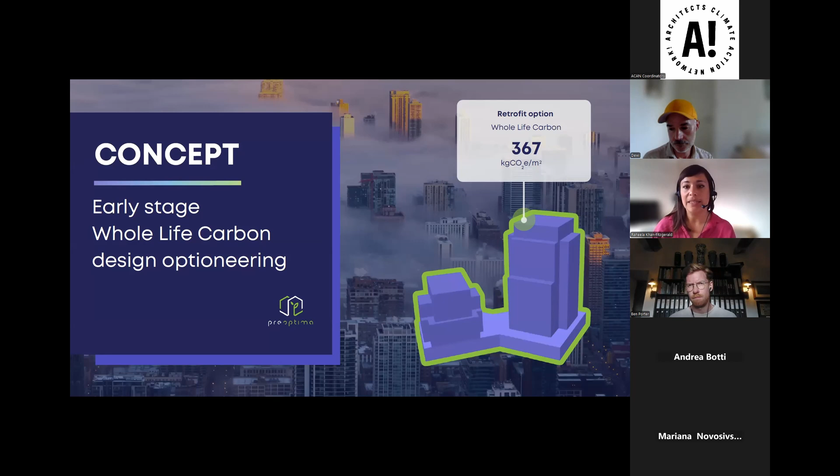Preoptima is a climate tech startup dedicated to developing innovative solutions to decarbonize the built environment. Our co-founders come from a background of over 25 years of academic research, and one of the first things Preoptima worked to launch was an industry-based web application called Concept, which is what I'll be talking about today. Concept performs real-time, accurate and easy to understand whole life carbon assessments and carbon optioneering from the earliest design stages. In 2023, in collaboration with Westminster City Council, Preoptima was also awarded an Innovate UK grant to develop the Planning Application Carbon Evaluation and Reduction Platform, or PACER for short. PACER aims to support local authorities to bridge the whole life carbon skills gap and ensure carbon policies lead to real impact. In essence, Preoptima's tools cover both the industry and public sectors, aiming to make whole life carbon measurement and management more accessible and intuitive for all in the industry.

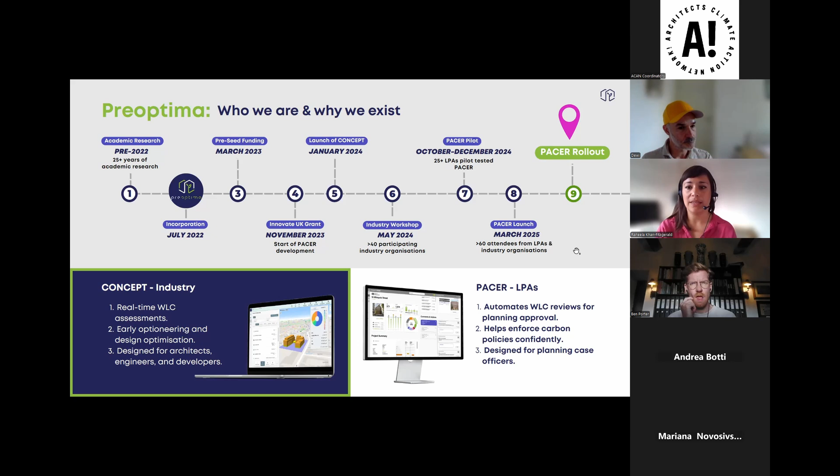And why now? I'm preaching to the converted here, but the UK has committed to an 81% reduction in emissions by 2035, of which construction plays an enormous part. To limit global warming to less than 1.5 degrees above pre-industrial levels, as per the Paris Agreement, there's an ever-pressing need to reduce and eliminate these emissions immediately while it remains technically possible. The longer we take to implement these policies, the quicker that opportunity window closes. That's, I guess, why we're all here today.

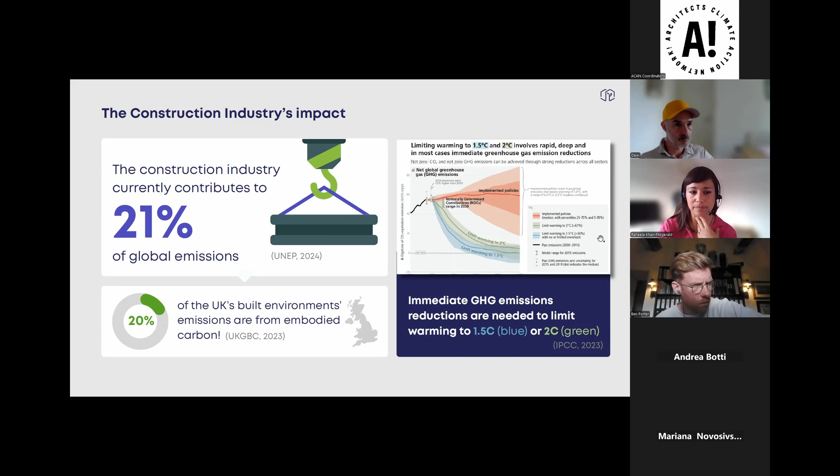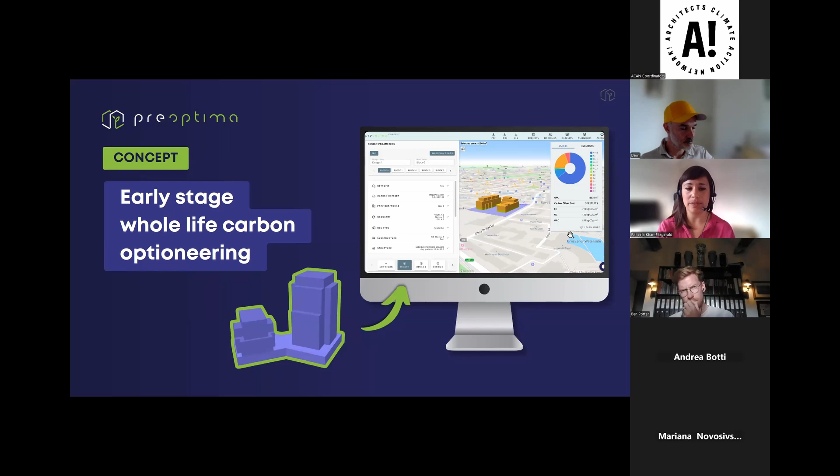Concept is an early stage iterative web-based design tool based on massing modeling for quick and easy comparison of different design options, including existing buildings or reuse of building elements. Why is it early stage based? The ability to affect whole life carbon reduction potential of a building or built asset is highest in those early design phases. So the ambition is to try to lock in low carbon design decision making and principles early on, which is why the tool is based within RIBA stage 2, or pre-application planning stage.

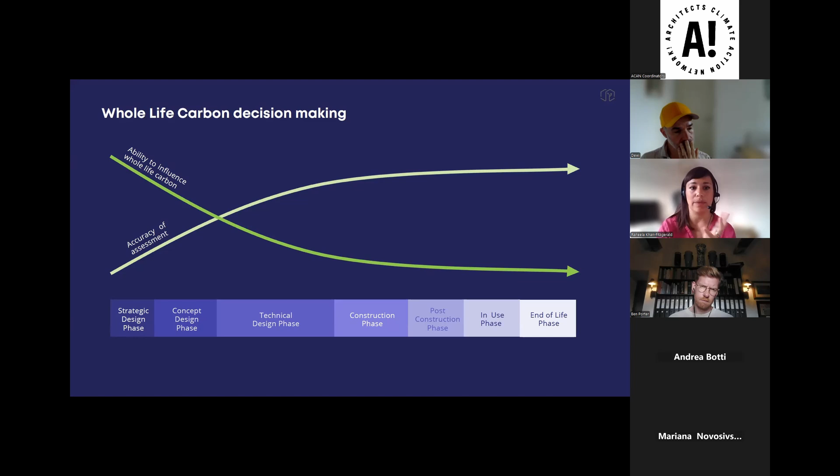The tool is based on the RICS second edition, the most updated RICS edition, which is aligned to EN 15978. Concept is a whole life carbon tool covering system boundaries A1 to A5, B1 to B7, C1 to C4, and Module D. It doesn't cover A0, pre-construction, as it's deemed negligible for this purpose, nor does it include user carbon B8.

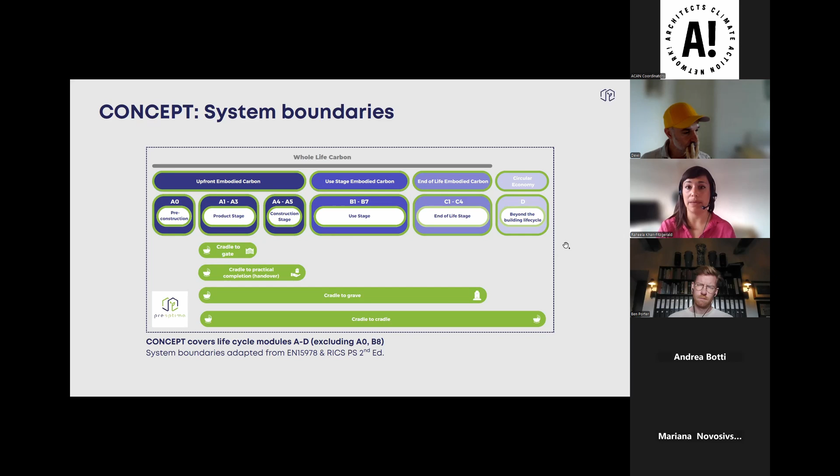The tool is built around UK generic databases, but users can add further material data or databases, including EPDs if needed. They also have access to pre-built building element designs, such as wall and roof build-ups. These databases are regularly updated, between 1 to 2 years. Specifically, A1 to A3 data has been taken from the ICE version 4 database, plus a couple of industry values from EPDs where there's no generic data available, for example C30 concrete or raised access floor.

For the majority of the modules for transport, waste, in use, and end of life, these follow the RICS methodology. The tool uses expected lifespans, transport scenarios, and end of life scenarios from RICS version 2. Waste rates are primarily derived from the BRE Global Product Category rules for Type III EPD of construction products, or smart waste, or from the same data sources like EPDs if available. For water use, carbon emissions are determined by the maximum daily water consumption values from the BSRIA rules of thumb and general occupancy assumptions for that building type.

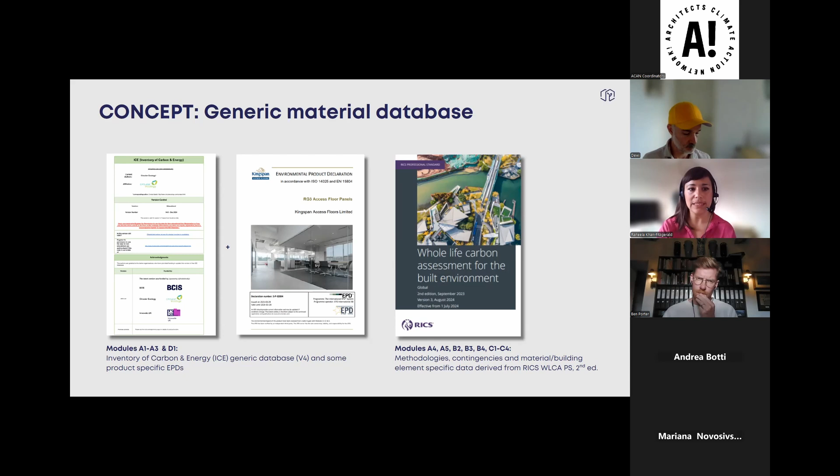The tool covers most of the building element categories as per RICS, apart from prefabricated building units, category 6, and works to existing buildings, which we're looking to develop upon.

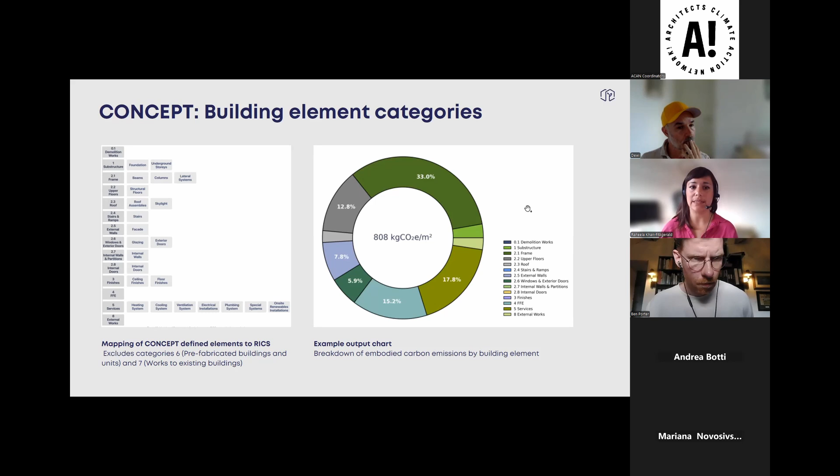Each assessment breaks the whole life carbon data into the building elements, as you can see with the chart on the right-hand side, as well as by LCA module and against benchmarks. You can download all that data as a detailed PDF report, including information about the data sources and the tool's methodology.

So how does the tool actually work? Concept approaches the building design holistically. For example, any changes to the external facade will result in the tool recalculating or reassessing the structural system to align to those amended loads.

For the structure, given a simplified massing model, material quantities required to calculate the carbon footprint of the structural system are estimated by automated structural design for each individual member. Individual cross-sectional sizes are calculated on imposed and permanent loading, based on the use type of the building, wind pressure, and average grid sizes, which are defined by the user. The user inputs the grid spans.

The tool offers a substantial systems library, so users are able to choose from pre-built facades, glazing, internal walls, ceiling and floor finishes, external and internal door assemblies as well. These are crucially fully editable, so the user can also create their own, and they can also create buildups relating to existing elements to support any retrofit optioneering.

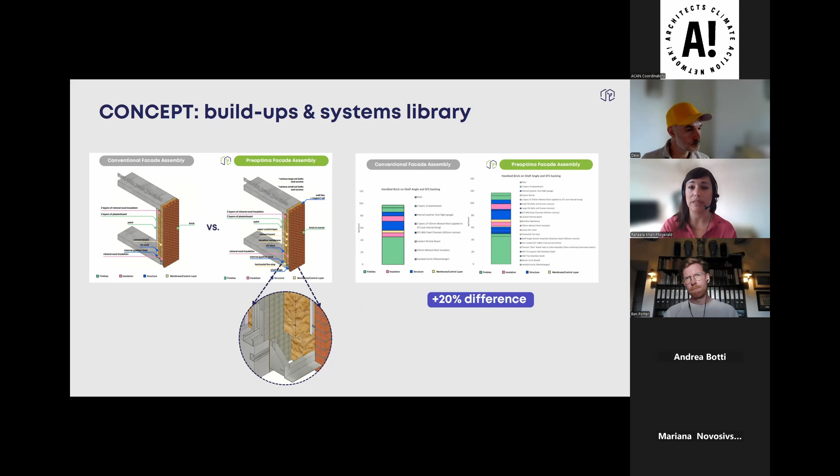These library buildups are highly detailed. For example, the external wall example you see there includes fire stops, bolts, screws, and the breather membrane, which at times can account for a 20% increase in embodied carbon over a less detailed conventional buildup.

But the tool in essence is very easy, intuitive, and quick to use. It's designed for retrofit as well as common new building typologies. It's not designed for infrastructure projects or bespoke structural designs such as cantilevers, but it can be used for conventional commercial buildings, offices, mixed use, or high-rise residential. It's best applied to multi-level tower or major projects and not really for one-off small-scale residential.

In order to use it, the first 3 steps are to import or create your geometry. The tool takes a simple OBJ file, and then the user needs to select the design parameters, such as the span for the structural grid, what type of facade it is, roof or MEP systems, as well as inputting the EUI for the operational energy.

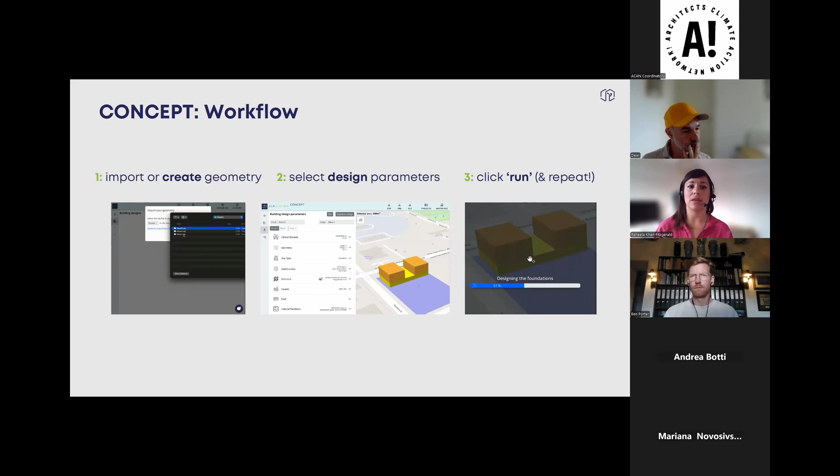Then at a click of a button, the tool analyzes the whole life carbon, and the process can be repeated again for different designs or tweaks.

The tool offers a comparison for those different designs, and they can be edited and refined further. All these options come with a detailed view of results, including a PDF report, an XLS Excel spreadsheet you can download, and also you can re-download your massing file if you've edited that at all.

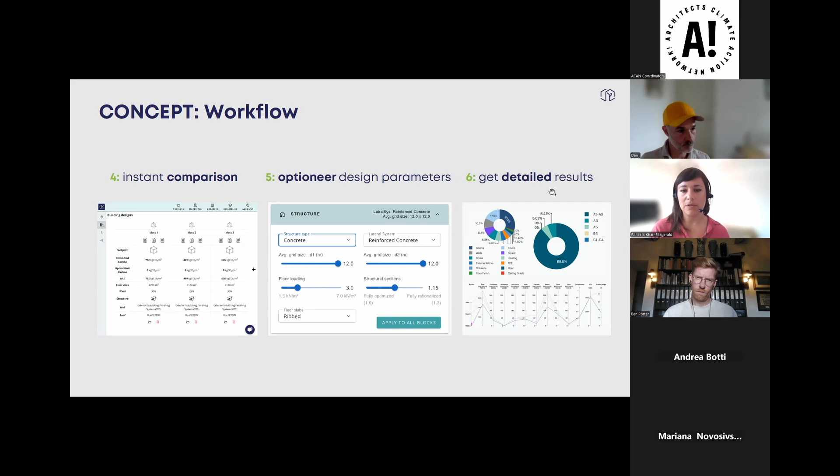In terms of support, any user can access the Knowledge Hub at any point. That's hosted online, and it sets out how to use the tool, with manuals as well as information on the tool's scope and methodologies. Video tutorials are also embedded, but these can also be found on a YouTube channel.

In terms of cost, the tool is adaptable to your needs. Preoptima offers bespoke licensing options, including access to the API. You can also go away today and try it for free with our Lite option, for 1 project, 3 designs, 3 users. Or if you need more users and project designs, the annual licensing cost is £3,600 a year. We're also keen to have engaged users who'd like to pilot test the tool, so please do reach out if you're interested in further development of the tool or more bespoke pricing.

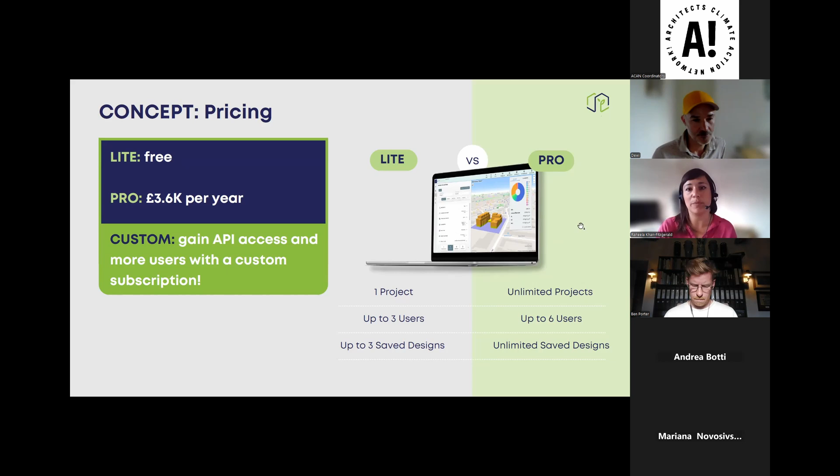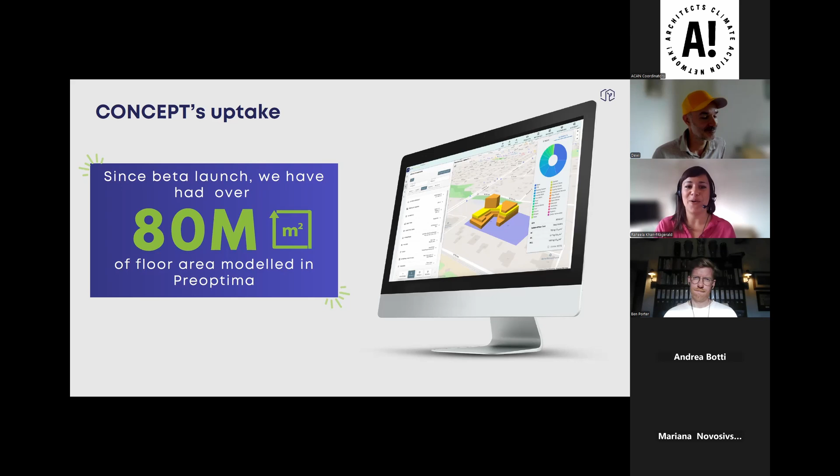But don't just take my word for it, the tool has been avidly used. The data you see there is similar to analyzing the Shard 727 times, or twice the area of Oxford.

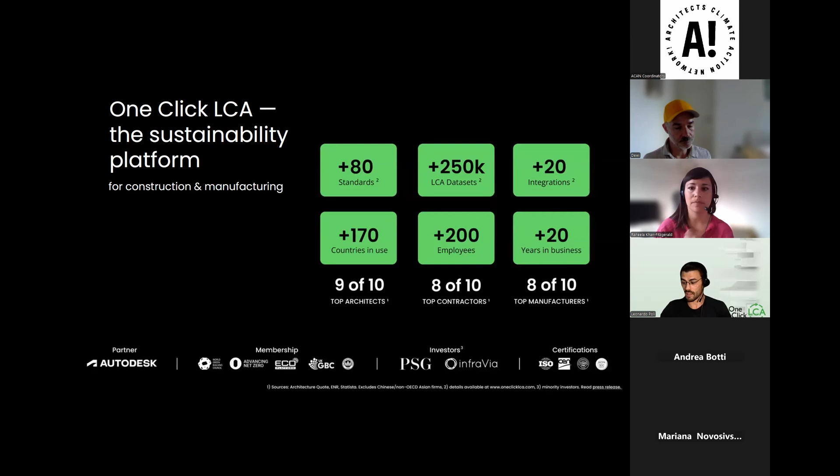So this is a bit of an overview of the connection, or the interconnection within the industry.

We're also a member of a number of different organizations that you can see there, and we also operate with those collaborators that you see on the bottom left-hand side of the screen.

What we're trying to do is to connect the entire industry, from engineers to architects to manufacturers, builders, investors, and institutions, which I believe is really powerful, especially now that we're trying to decarbonize not in a silo, but as an industry. As already highlighted by Rahila, we're trying to do that very, very quickly. So interconnection of individuals to maximize the return of our efforts is, in theory, probably the best way forward.

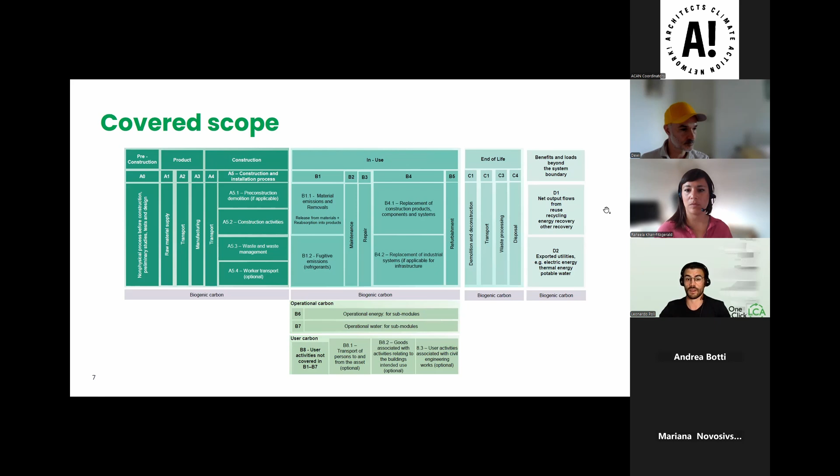In terms of the covered scope, because we have so many different tools, the scope that we cover is basically the full scope available from A0 to C4, inclusive of B6, B7, and B8, and also module D1 and D2. You might also recognize this table from the RICS version 2.

Because we have so many tools, there is a bit of need for guidance. The good news is that OneClick LCA, depending on the tool that you select, the scope will be automatically preset. So here is a bit of examples of the scope preset.

Talking of tailoring, by selecting the relevant tool, you're not just selecting the scope, you're also allowing yourself to select the right type of data and compliance for the specific tool. So when it comes to data, each different regulation, manual, or standard will have its requirements. For EN 15978 or levels, we might be talking about type 3 declarations, EPDs, or type 2 declarations only, so EN 15804 aligned data but not third-party verified, for example. That's the type of data you will find within that tool.

Also within that tool, there will be a tailoring of the results to allow you to carry out the assessment with the confidence that you will comply at every single level, whether that be the scope, the data, the reporting, and obviously the building elements that you will include. I need to specify for RICS there's also the inclusion of type 1 declarations, which would include stuff like TM65, BECD data, and also ICE.

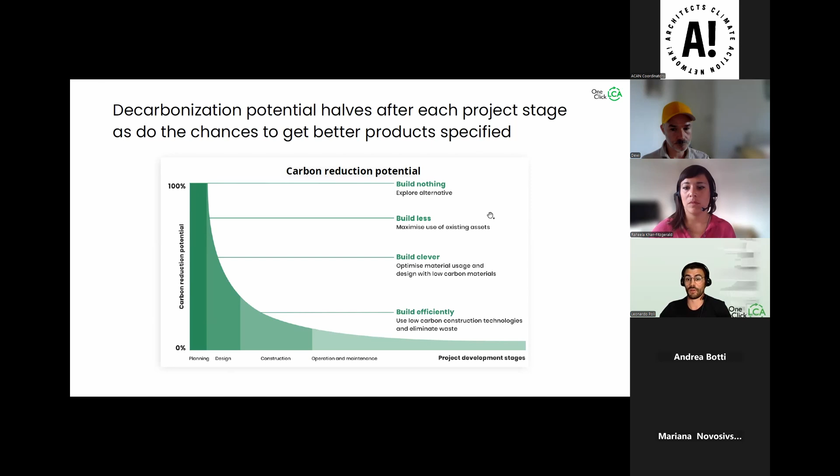And everything in between is essentially a reduction of our opportunity to reduce carbon. Obviously, this comes with a bit of a conundrum because it's really hard to define, even at a very qualitative level, the impacts of your sustainability-led initiatives when you don't have a design. And at that point, we have a loss of potential carbon reductions.

This is why within OneClick, we've developed a tool that will follow you throughout each design stage and allow you to maximize the reduction potentials, giving you the tools that are relevant for you to influence, whether that be the client, the developer, the design team, or anyone else involved within the design process. This all starts at the strategy level, where you can use Carbon Designer 3D.

Carbon Designer 3D is a generative life cycle assessment application, which allows you to generate a multitude of different designs to provide solutions. The only thing you ideally need for Carbon Designer 3D is essentially the area of your building, the type of building you're going to develop, and ideally the location it's going to be developed in.

And OneClick will be able to generate multiple iterations with different structures, different arrangements. There's been a recent update where you can move from a shoebox to an E shape to an L shape, with different heights. So you can see there are different solutions you can propose, supercharging the conversation even at the early stages.

The other tools, the other applications I will mention, are the use or implementation of BIM-based software. So you can use Revit, Bentley, or Tekla to import your material quantities, but you can also implement the use of Rhino, Grasshopper, or IES to import the modeled quantities even at the early stages. So there's all that additional...

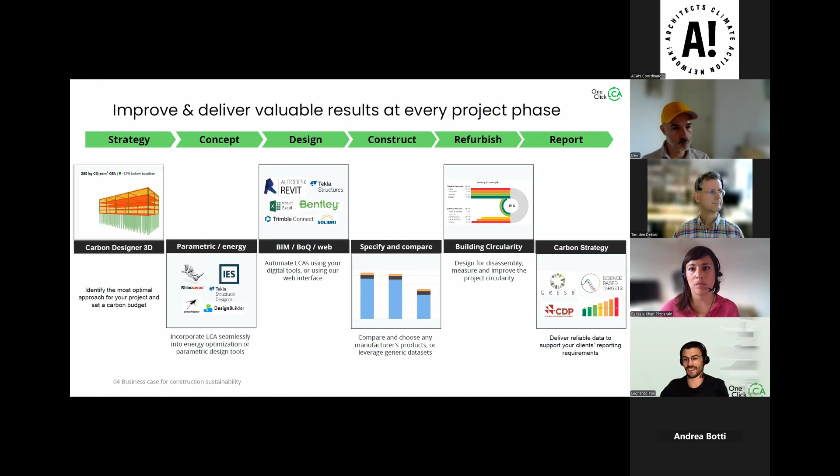This is all going well in the sense of executing the work, but then obviously real impacts are shown when the actions are followed through. And what's important to that is delivering a strong message. That's exactly what we're trying to do, by allowing you to find, achieve, and show reduction in the most effective and quick way. Next slide.

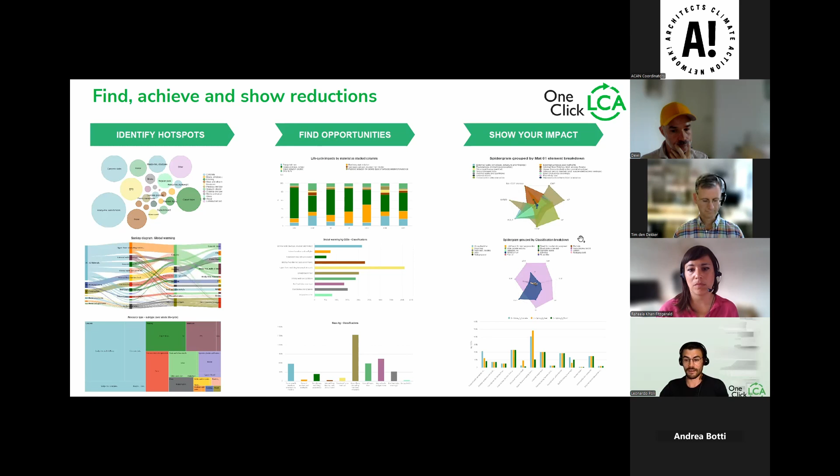Finally, to wrap things up, you're not alone in developing your skills in lifecycle assessment. We do have a range of tools or resources that you can use, such as the OneClick LCA Academy, the Help Center, research and policy, and obviously experts such as myself.

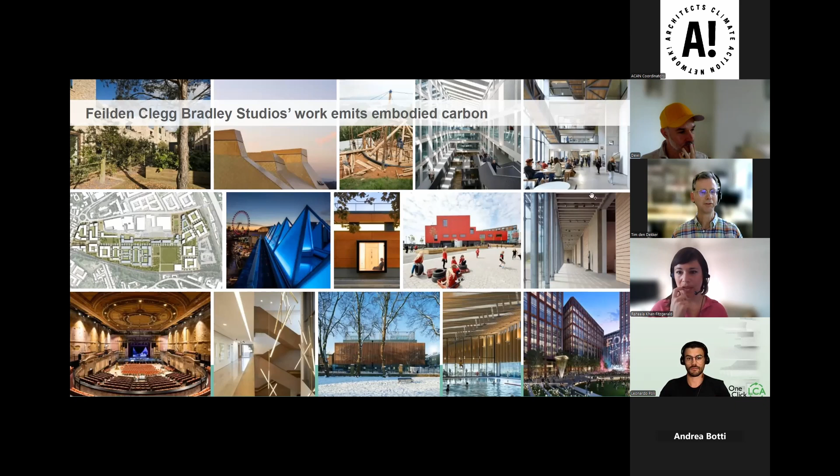So to deal with the embodied carbon side of things, we developed FCBS Carbon for the UK. It's an early stage design, whole life carbon calculator tool, and it's all about the direction and magnitude of carbon - really a tool for comparing various design options. But it can be used anywhere in the world because it's all about direction and magnitude. The idea was to get FCBS Carbon central to early design decisions.

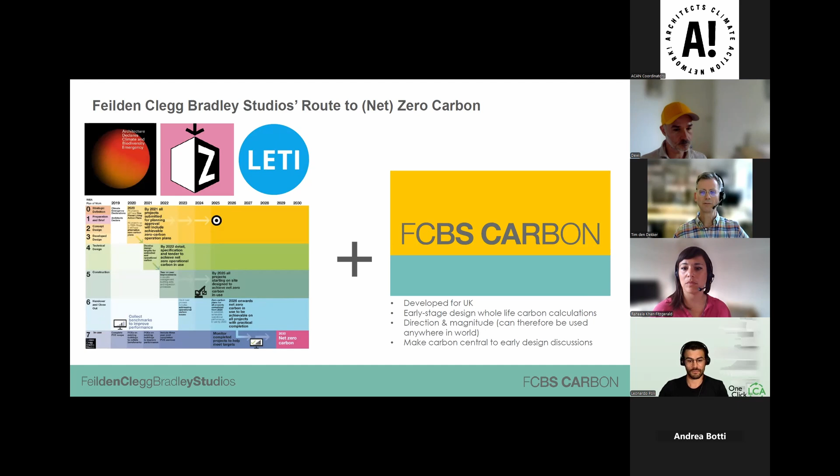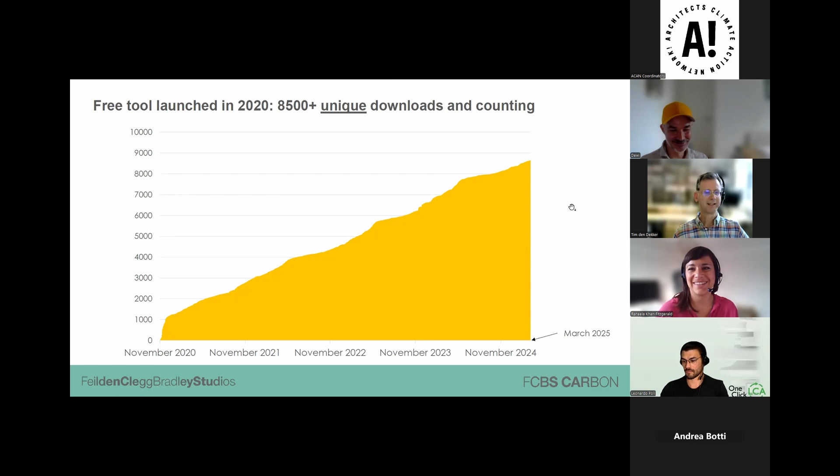Let's talk a little bit about the technical scope. To build an accurate whole life carbon model, you really need to build the materials. But at the early stage of projects, you don't have that. You do want to know the impact of your decisions - what if I do this in this kind of structure, or if I have a different glazing ratio, etc. That's time consuming.

So instead, we ask for a few inputs and we algorithmically describe a notional building. We build a notional building in the software, a bit like you've seen in the last two presentations, using standard construction build-ups, and then apply that to the notional building to produce some very fast outputs.

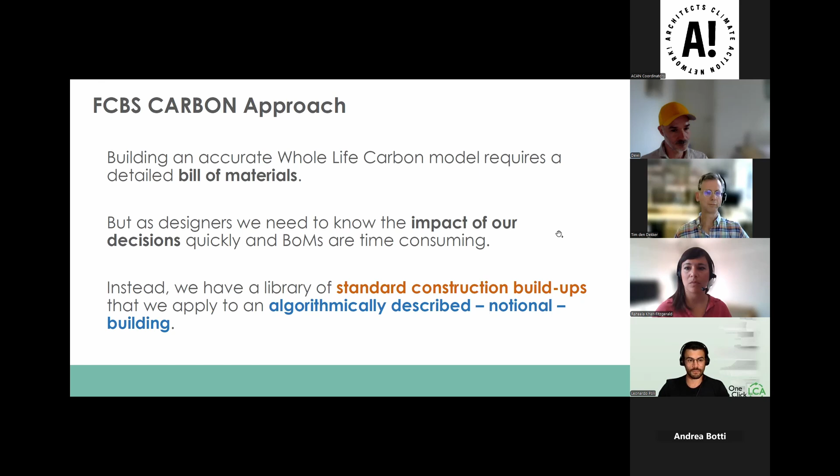Just a recap - calculating embodied carbon is simple maths. You need to know how much stuff is in your building, and you need to know the emissions for producing a kilo of that stuff. It's really sort of the same process as calculating operational carbon.

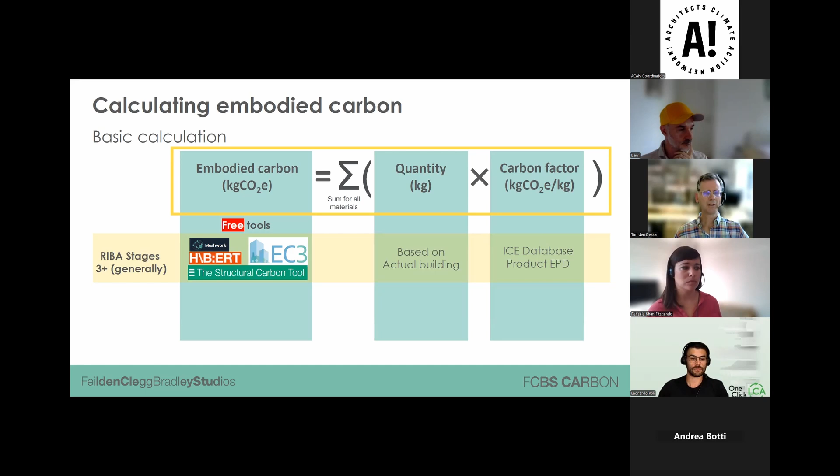Alternatively, FCBS Carbon does that for you - it calculates a notional building, and it's a lot faster.

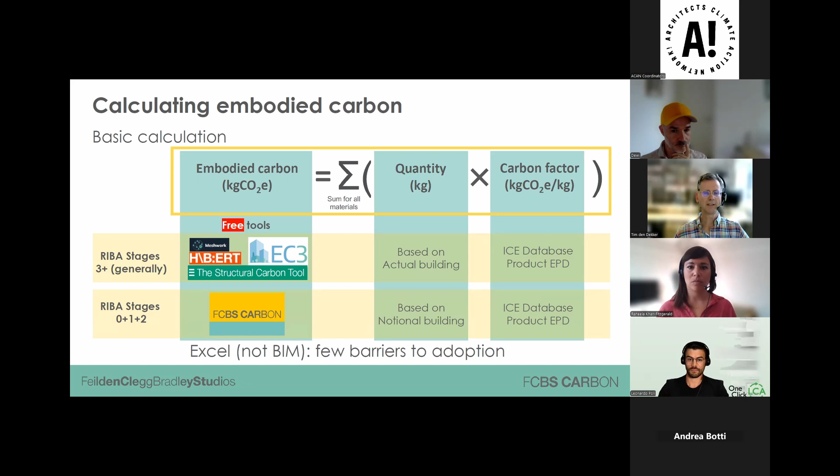You've seen this slide from our previous two presenters, and really in the initial stages, if you just look at the RIBA stages, project stages, you really want to understand - for example, if you do a refurb or new build - those key decisions upfront: what kind of structural elements, then your facade. As you go along, decisions about MEP, partitions, finishes, and FF&E really have a much smaller impact and can be made much further down the line.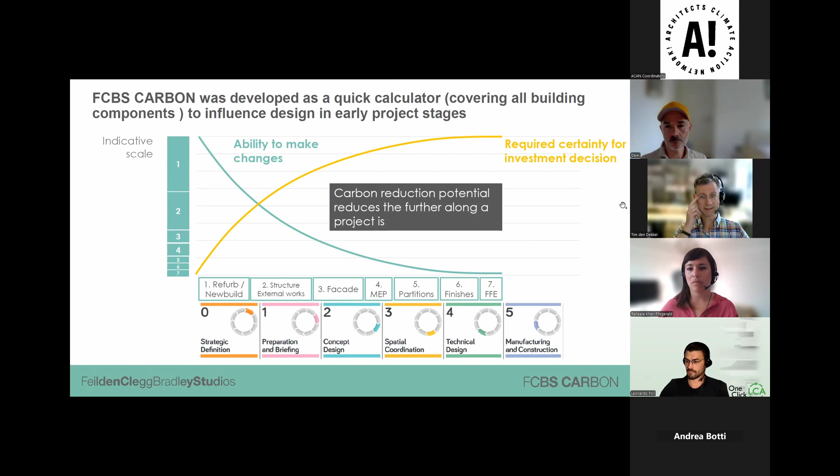It's really that carbon reduction potential reduces as we've all been saying. So FCBS Carbon is about those first 3 stages.

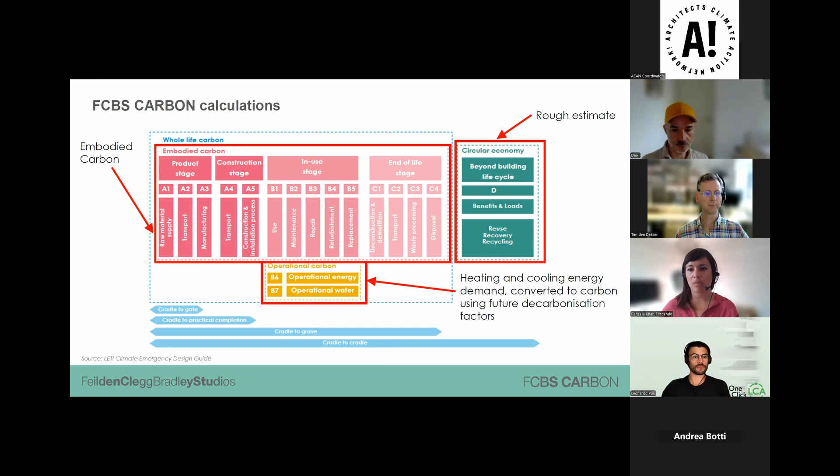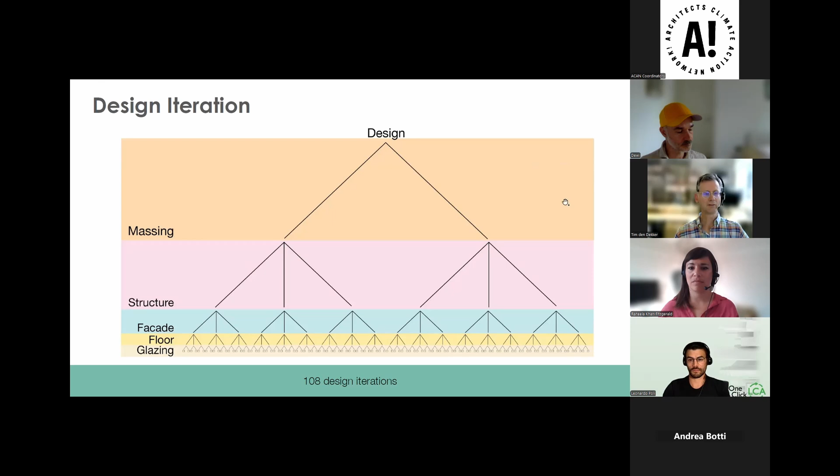We do housing typologies. Within that it's flats, maisonettes, single family house, multifamily offices, and we do new build and retrofit.

In terms of data sources, transparency, functionality, ease of use, the carbon factors, like most software you've seen, is from the ICE database. You really should not be using EPD prior to stage 4, because you don't know what products you're going to use until you get a contractor on board and get into technical design. So the ICE database is brilliant.

We've got a database of standard construction build-ups. It's Excel-based, it's freely downloadable, it's not interoperable with BIM, and have a look at those links for training on our website. There's a great YouTube video with Jack Williams giving a fantastic detailed explanation on how to run it.

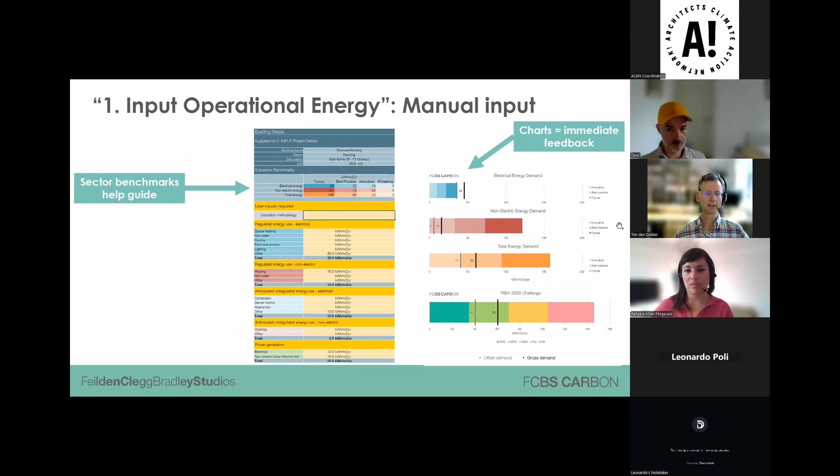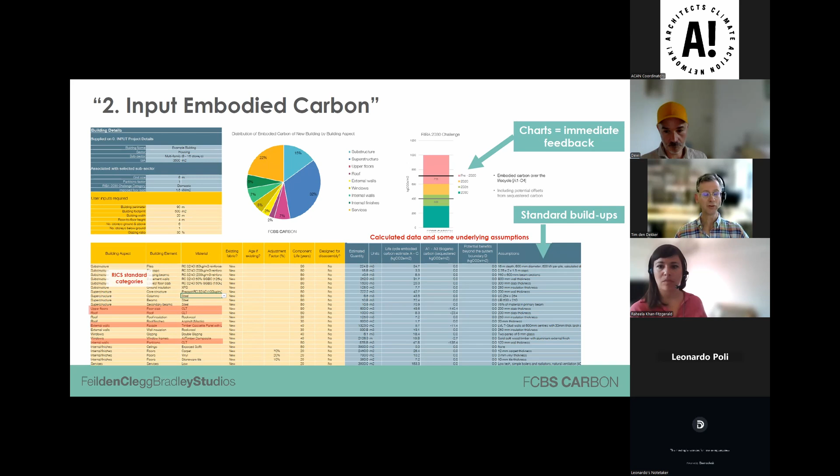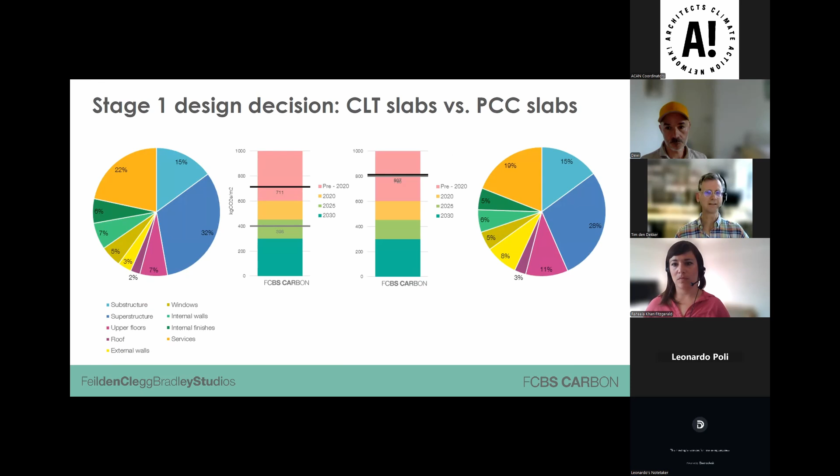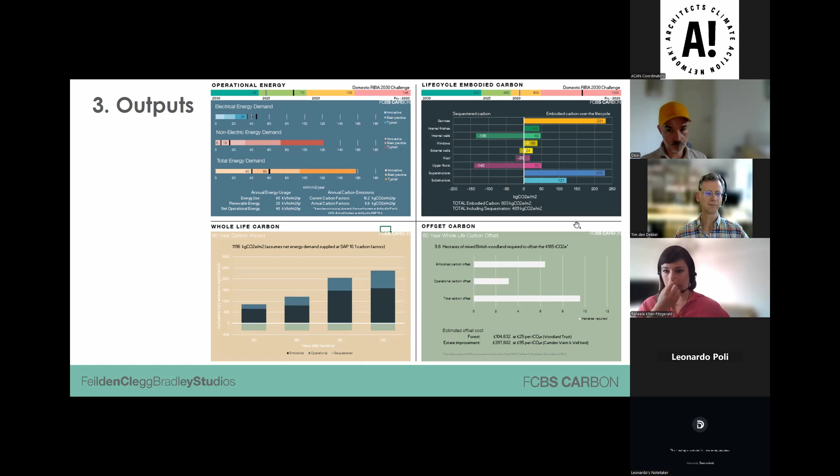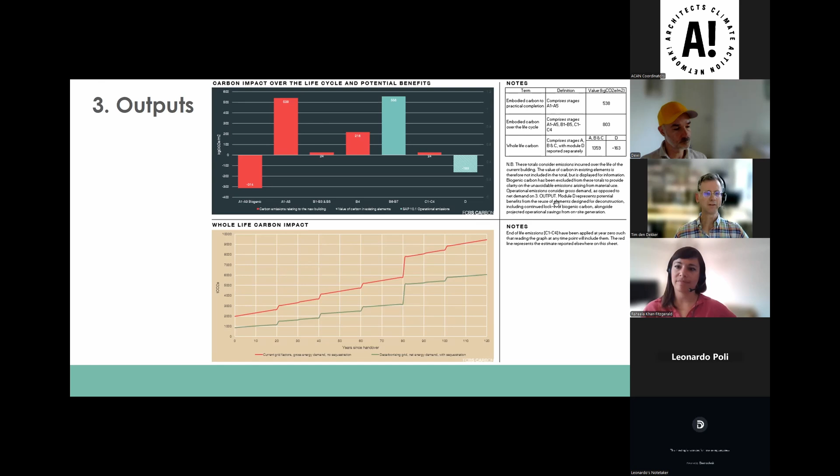This is just a reminder what it's all about - we've developed this tool as a quick and very dirty method to compare various design options.

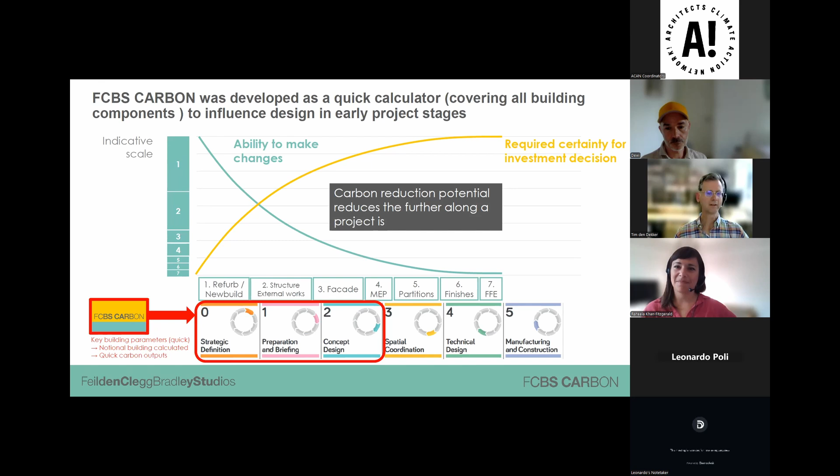Thank you very much. It's great hearing about all the other tools as well. Thanks, Dewey. Great, thank you so much, Tim. Perfect timing as well, doing well this evening. Doug? No pressure from me then.

Hi guys, Doug from Mesh Energy. It's great to be able to follow some of these other speakers. Funnily enough, I was on the phone regularly with Jack Williams when Feilden Clegg Bradley Studios were developing theirs through lockdown. I kind of got half bored and needed to understand some more about embodied carbon, and that was the genesis for creating our particular tool here.

Just a quick overview of us - we're building services and building performance consultants. We're not architects, we're guys who are designing with wider teams. Embodied carbon - we love data at Mesh Energy as well as kind of practical solutions. But embodied carbon, and actually in the wider context of the work that the RIBA has been doing as part of the 2030 climate challenge, and all the great work that LETI's been doing, this is again what's formed the background behind our tool.

It's built by us. In fact, the tool was actually coded by me. Nobody else in the company's touched it apart from me. We've tried and tested it time and time again, used on loads and loads of projects, but it's myself that coded it, and I'm pretty good in Excel, so I decided to do it in Excel.

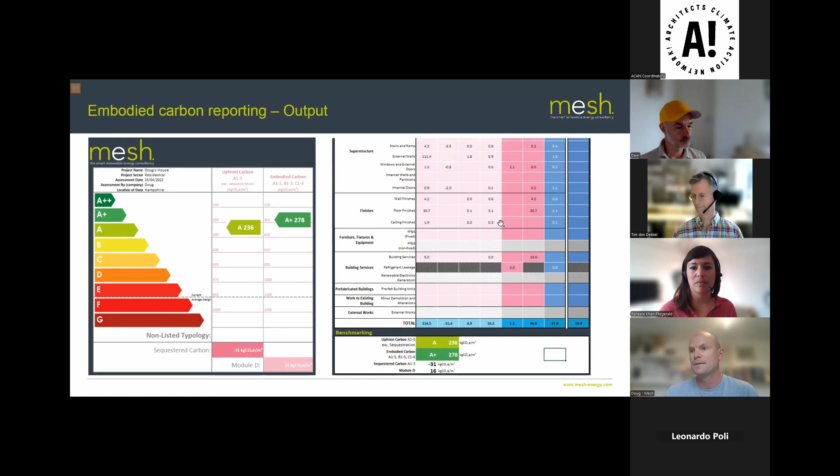Again, nothing particularly interesting here. It's exactly what the other guys have said. This is kind of standard stuff again in the RIBA 2030 and LETI embodied carbon documentation. So we've got upfront carbon and embodied carbon - that's what you get out of the tool as you're adding materials.

As far as usability and functionality goes, it's desktop. You're downloading the Excel file, the latest version hopefully, and you can work on that on desktops, Windows and Macs and stuff. It's an Excel spreadsheet file. What we've tried to do is put all of the data for the structure in one page. It's quite difficult because even simple information, there's a lot of it. So there's a few tabs, but there's one main working sheet for it.

As I say, it's very simple data line entries. So you pick the material you want to put into it, you say what the area is, you say what the thickness is, or you say what the volume is, and you do that for individual build-ups, be it walls, floors, intermediate floors, internal walls - all the stuff that you can think of that goes into that structure. And the numbers will build up and give you that instantaneous feedback.

Is there anything else on that one? No, I think that's probably it.

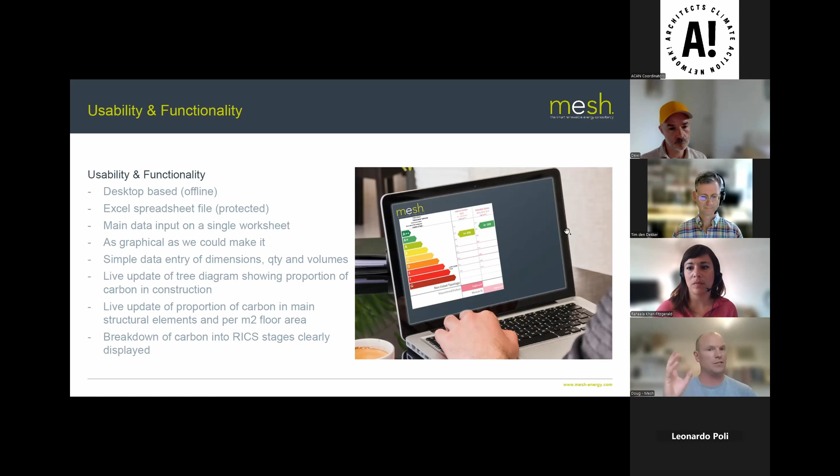Next slide, please. And this kind of gives you, we've got one more here. Okay, so...

You can pick from about 55 materials. These are materials which we've used EPD data from, but knowing that people have all kinds of weird and wacky materials that we haven't thought of, you get to put up to 30 of your own in there if you've got the EPDs or carbon information through the various stages. Even though 55 doesn't sound like much, and we've tried to condense the materials into certain element types, you can actually search materials. So if you know it's concrete something, by the time you've written CON in the search bar, you're down to a few materials to pick from. We tried to make it really quick and easy to use.

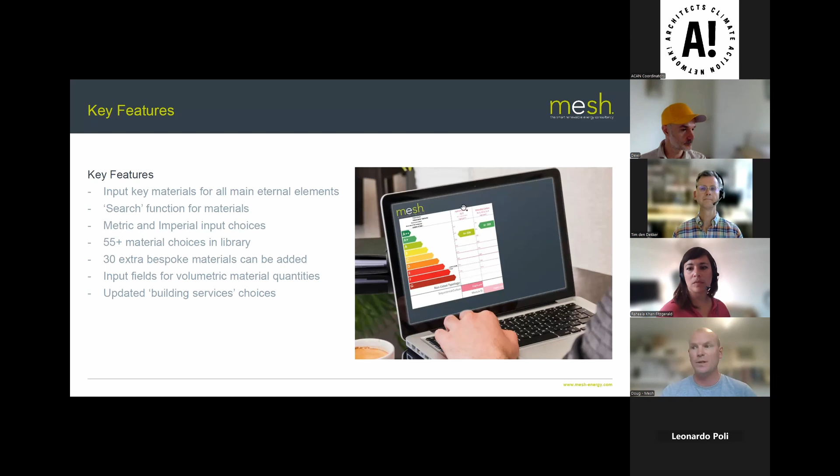Next slide, please, which I think gives an overview of the rough layout. Of course you can't see any of the data here, but this is the kind of interface in front of you. At the top is the information about the project, whether it's residential, and some of your targets - you can pick a LETI or an RIBA embodied carbon target. The yellowish cells are the ones you can fill in. The blue box in the middle towards the bottom shows you live the carbon in those RICS life cycle stages.

On the far right hand side is the graphical information. You can see the tree diagram in the bottom right corner for different elements. There's a blue block there which is a large amount of carbon in one of the materials in that element, and it will tell you where that carbon's coming from. The graph in the top right corner is about carbon in the overall structural element.

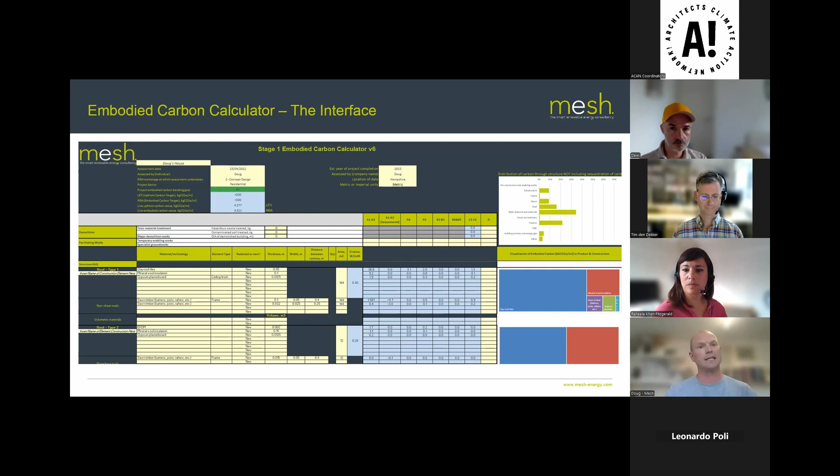So one of them will be the roof, one will be the ground floor, one will be building services. It allows you in a single shot to see the carbon impact more holistically, but in enough detail that you can swap out a particular material and see instantaneously how it changes. Next slide, please.

As far as ease of use and the typologies this is typically used on, we don't really provide training per se. Usually we upload videos about new features and generally how to use the tool, but it's so easy to use that generally we don't get too many questions. We do have people emailing us directly, and I'll jump on a quick call with them, or one of my colleagues will. It tends to be a bit more ad hoc like that - we haven't got a big training academy or anything like that.

Fundamentally, you can use this tool across any typologies. What we typically see is people using it for homes, extensions, smaller buildings. It's used a huge amount for awards entries - people call us up at the last minute and say, I've got an award entry I need to do for the RIBA, and this is a recommended tool for the RIBA to use as part of award entries. With like two days to go, they're asking how can we use this tool to get the answer we need for this award entry.

But I'd say it can be used for anything as long as you've got the materials and the volumes and stuff that you need. You can use it very successfully on pretty much any building that you could conceive, but it is early stage, and that's the disclaimer.

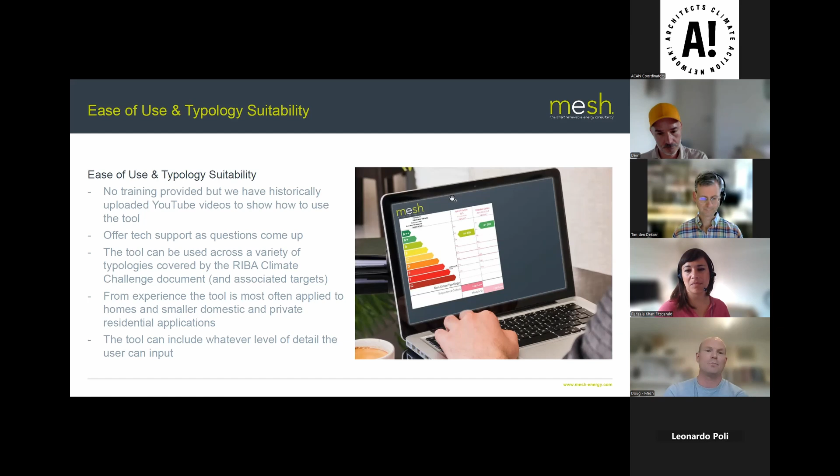And then the final slide here - next slide, thanks Julie. So the final thing is it's totally free. We give this away, we don't charge for it at all, and it has been since its inception. There's a bit of us that thinks, should we be doing a pro or paid-for version? That is being considered, as we can see the immense value that people are getting out of it. I've also thought about possibly making an online version of this, so it's constantly up to date - you haven't got to download the particular file and make sure you've got the latest version.

And that's it. That is a very whistle-stop tour of the Mesh Embodied Carbon Calculator tool.

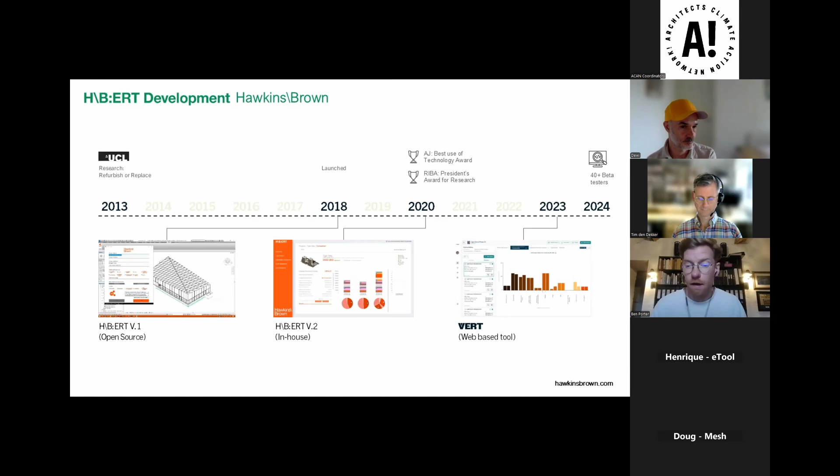In short, HBERT calculates the embodied carbon of modeled elements in Revit by measuring the volume of tagged materials in the 3D model and then applying carbon metrics to them.

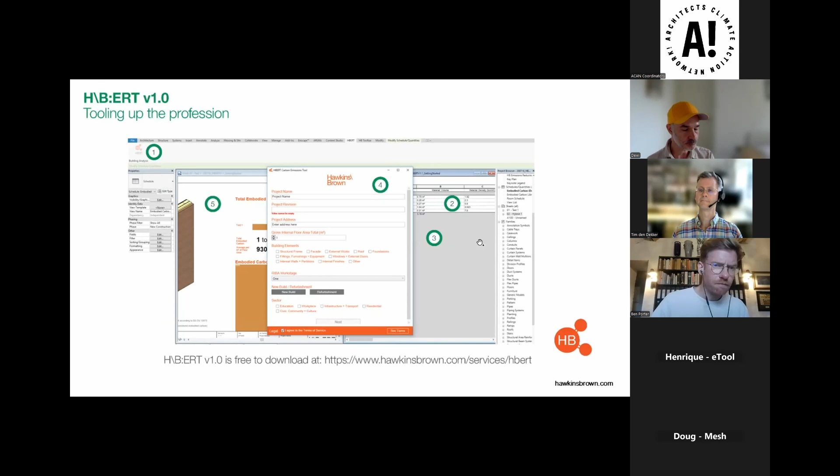Pretty simply, it consists of 5 key parts: the plugin, which is the bit in your Revit toolbar; the material library, shown here as a material list; the embodied carbon schedule, which is really the backbone of the tool; a simple user interface where project-specific information can be entered and results displayed; and then it generates a sheet within your Revit sheet list with all the graphs and graphics in it.

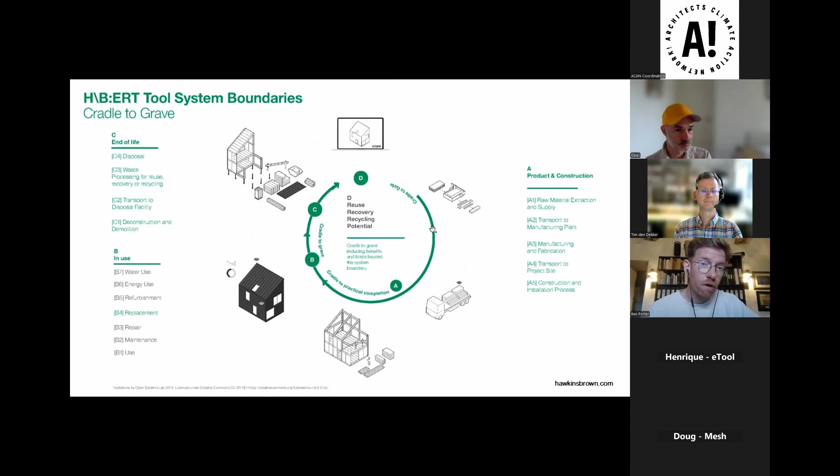In terms of the system boundaries, using industry standard lifecycle stages, the tool has a cradle to grave boundary, covering the lifecycle from product and construction through use to end of life. However, it is limited by available UK data sets, and doesn't include all in-use B stage data, shown here grayed out, or module D.

The first and most significant is the upfront carbon. There's a large carbon load before practical completion, meaning early decisions have the greatest short-term impact. It's important to understand where the emissions happen over time. There's a huge carbon load at this initial stage before practical completion of a building. This means the considerations we take before the building is even occupied will have the greatest effect in that short term.

It's worth noting that A4 and A5 calculations in HBERT don't yet align with the RICS V2 methodology.

Next is the in-use stage, covering occupancy and operational emissions from energy and water. As mentioned, HBERT only covers replacement cycles, which can be significant and are important to consider early. It's not fully RICS V2 aligned.

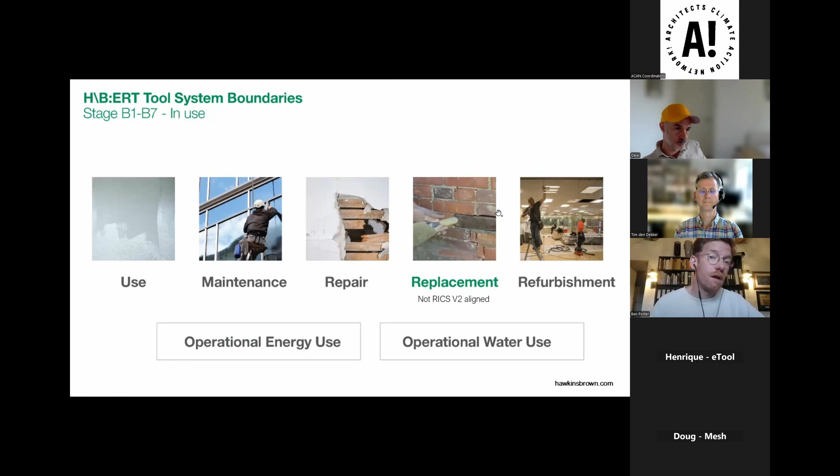It's equally important whilst designing to consider the disposal of the building at the end. This may be difficult to predict in the future. However, we can design for reuse and disassembly rather than for disposal and waste.

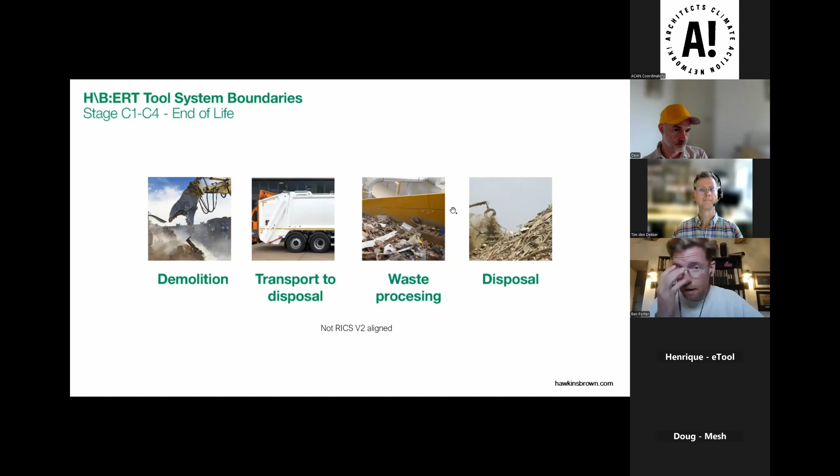So how do we get going? It's so easy. The first step is to measure and analyze. We must understand the impact of design. So getting started is super simple.

It does actually work up till and including Revit 2025. It's available from the Hawkins Brown website. You'll be directed towards a download form, and you complete the information to get access to the whole package, which includes user guidance documents, Revit template files, a case study, and the actual MSI installer.

Once installed, fire open Revit and the plugin will show in your toolbar. You'll need to follow the 4 steps, but most importantly, reassigning any current materials to the given HBA materials. So all the materials you need to use have the carbon metrics, and we'll come onto the material database next. To run the tool, you just click the toolbar button, fill out the simple project information — mostly GIA data — and hit publish. And it is that simple.

The tool provides 48 materials, with all the metadata baked into them. They have flexible material parameters which host the carbon data, and those feed into the embodied carbon schedules, very similar to a spreadsheet, as we've seen in some of the presentations today. It's pretty crucial to tag the right materials. That's a Revit limitation, of which there are many, but one to note here is if you duplicate a material...

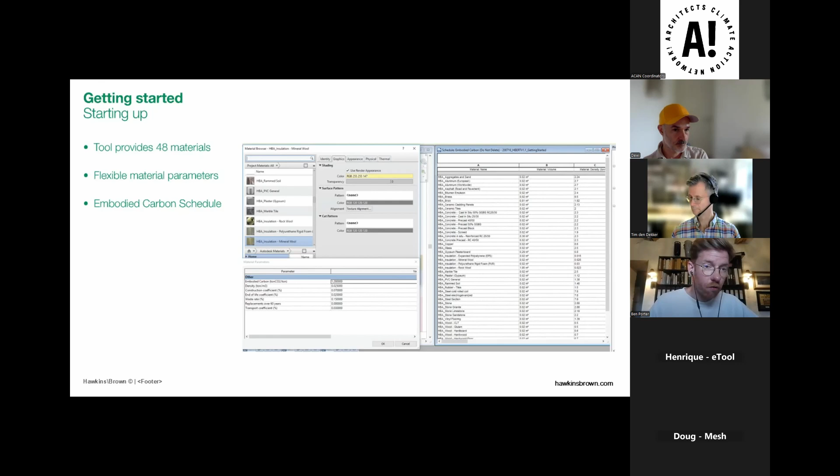The output of the tool is a visual sheet with some basic charts and graphics. For those interested in the back end, the LCA data on the left-hand side is taken from the Revit schedule, and the data underpinning the tool is visualized in easy to compare graphs. The idea is to generate embodied carbon data as early as possible in the design process, within the Revit environment.

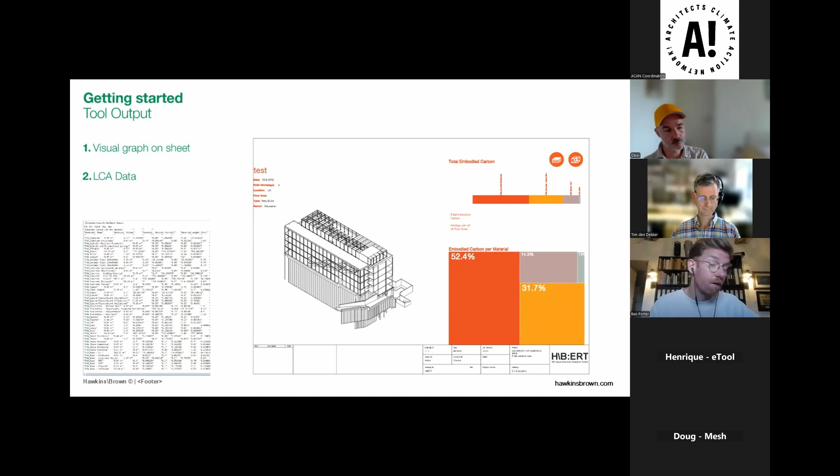That's when material choices are being made, which as we said is the bit of highest impact. The visual element is really important - this is how designers learn and communicate with each other, and how decisions can be made and communicated to stakeholders too. Next, common questions.

Data is the hot topic. We need consistency in the data to ensure comparable analyses. We're in the process of updating the database to the more recent Circular Ecology ICE v4 database - many tools, particularly free ones, use this database as it seems appropriate. HBERT applies generic construction, end of life, and transport coefficients as a percentage that can be customized, for example using specific EPD data.

The tool also includes waste and replacement rates, with more detail in the user guide worth checking out. Also worth noting that carbon storage is not yet included.

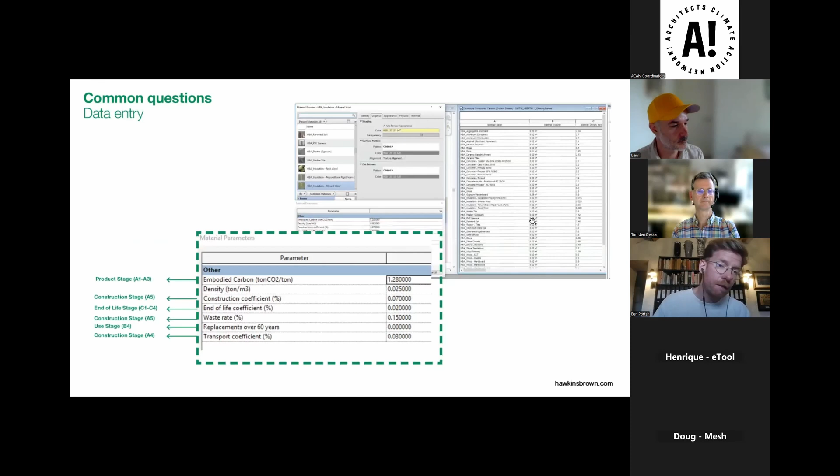For some users, it's also important to be able to use their own Revit templates - that might not be the case for you. However, I've put this in so you can see it's quite simple, with more detailed instructions should you download the tool, or if you've already downloaded it, it's in section 5 or so of the user guide - worth checking that out.

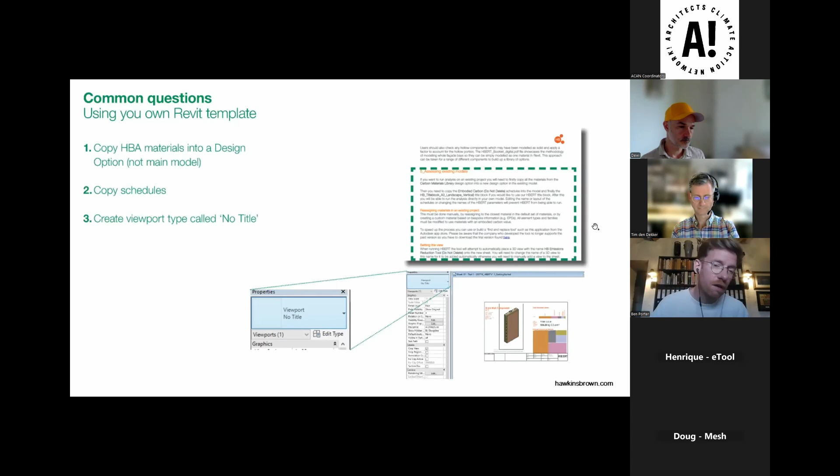Next, Revit limitations - sort of what I've built a career on. Most of us use Revit in a standard way, but it does have limitations. It's mostly based on assigning materials to a layer, which is a limitation when more than one material exists in reality in that zone or layer.

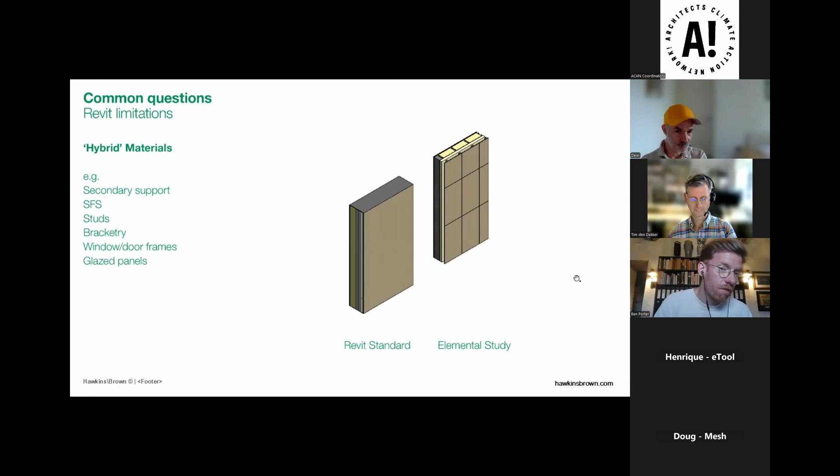Some other workarounds are shown here through the creation of what we call a hybrid material. It's not an industry standard, although this does take a deeper understanding of the carbon coefficients and the calculation process in the schedule.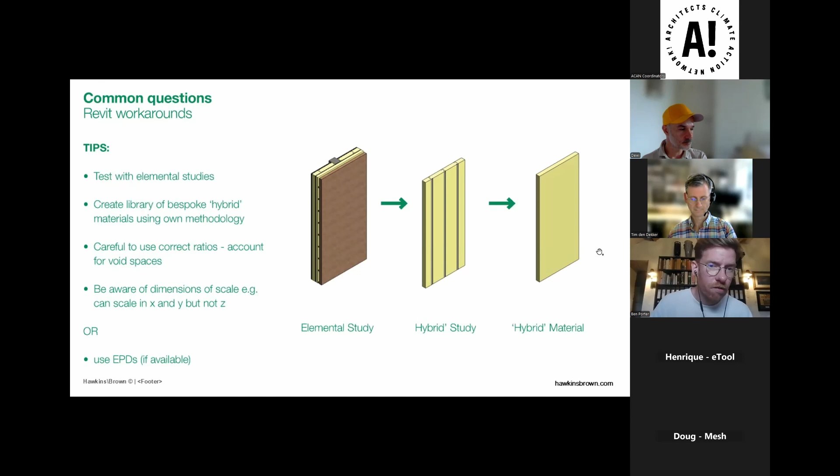However, an easier way to work around this is to try and find the relevant EPD for the product or system you're trying to use. The range of EPDs is ever growing, as we know. There's some tips for using EPDs in HBERT - we'd recommend, in the first instance, perhaps only using A1 to A3 product stage information, converting that data into a carbon coefficient, and then creating your material in Revit.

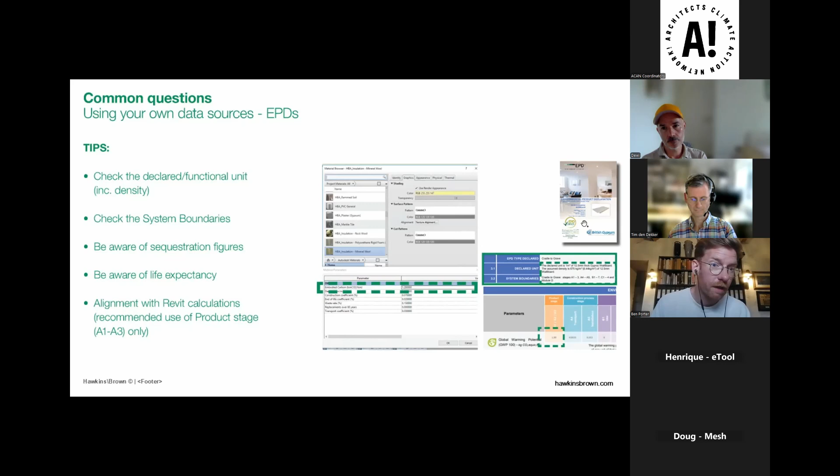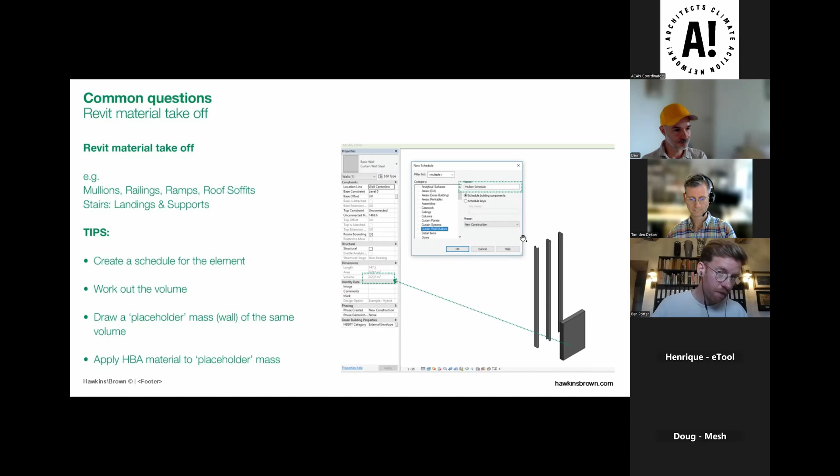Great, thank you so much for that, Ben and everyone. It's great to see them all side by side to get a good grasp of the breadth of the tools. Did I stop? I'll stop sharing.